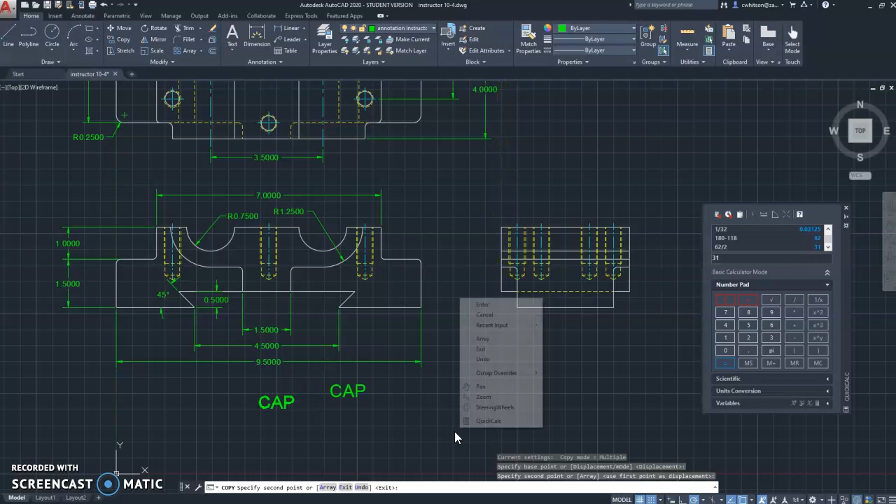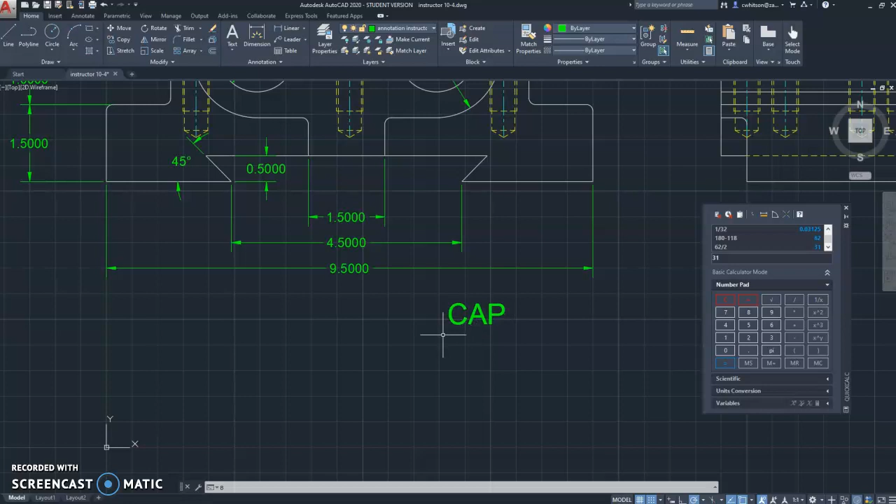So before we get started on that, I just noticed I need to copy some text down here. My escape button's not working. There, I'll just do it that way. Let's edit that to call this the base. Okay, I've got some weird computer issues going on here, hopefully that will settle down.

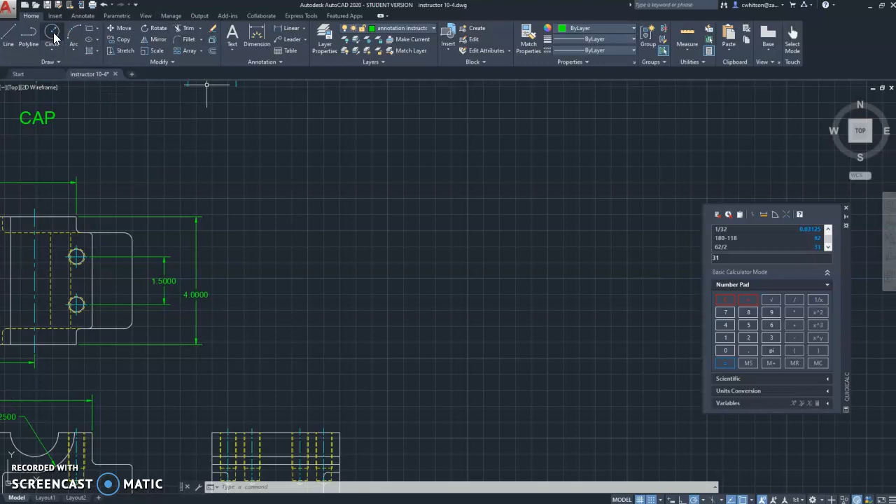Alright, so I think I will draw the bushing. I'll draw it over in this area somewhere. Let's start with the left side view, which is basically just a bunch of concentric circles.

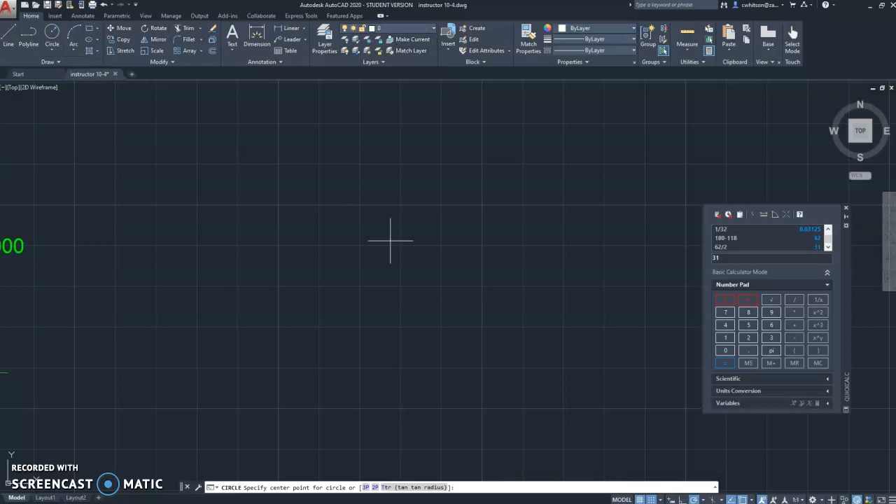Don't know why my escape button is not working, that is going to cause a problem. Hopefully it rectifies itself at some point. I want to go back to layer 0, and let's start a circle.

Okay, the outside diameter is 2. So D, enter, 2, enter. Then we've got a diameter of 1.5. And then the through hole is diameter of 1.125.

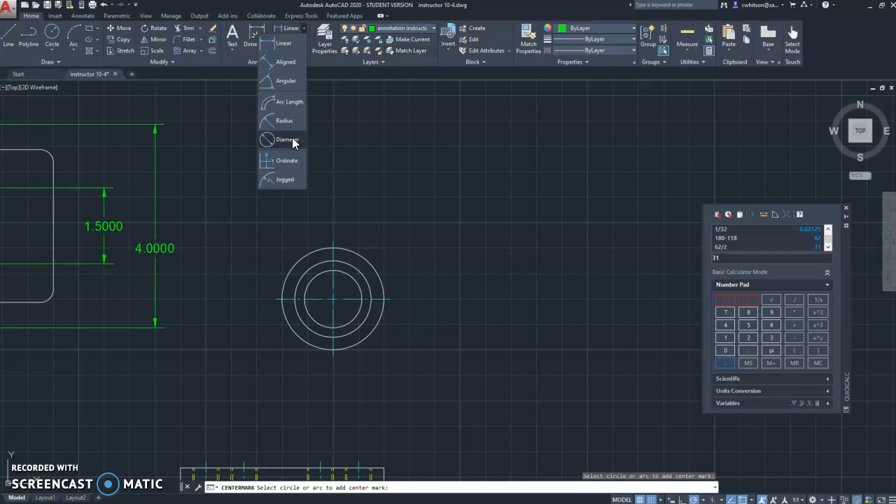Let's put a center mark on that, and let's go ahead and put our diameter dimension on it as well, on the through hole. I'll bring a center line, kind of use it as a construction line, over here to the right.

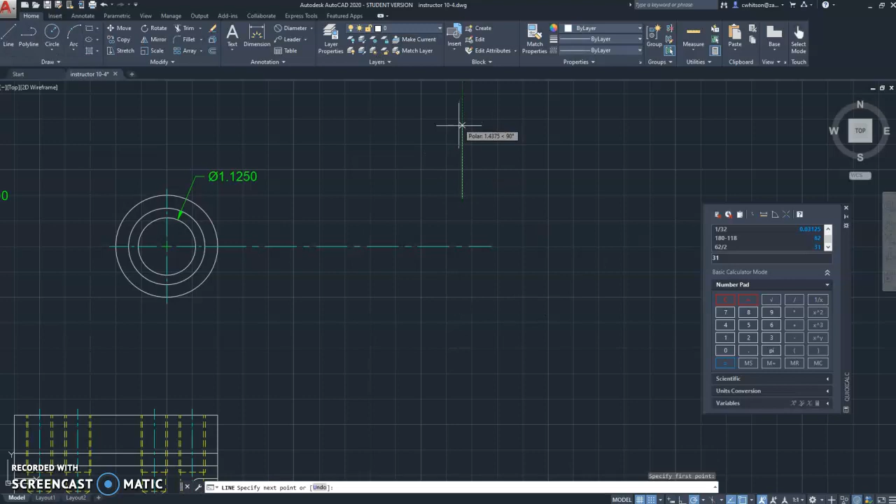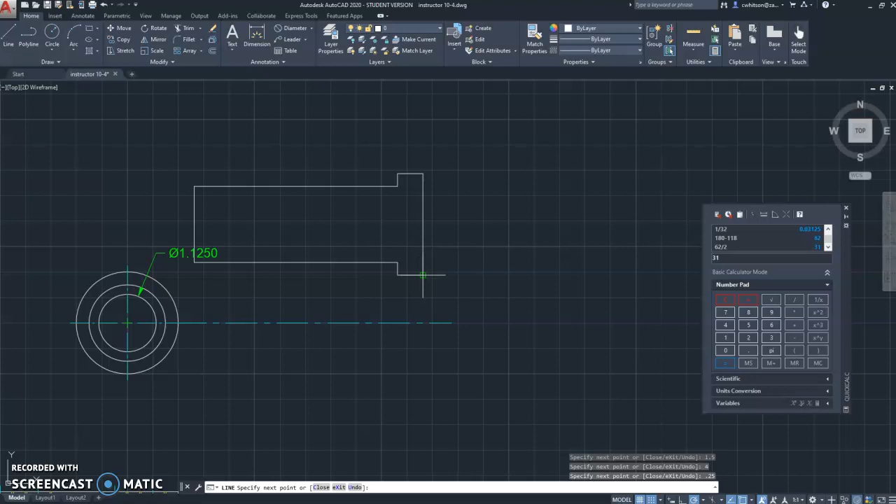And let's switch back to the 0 layer. I'm going to draw this - again, I don't worry about the exact position when I first draw it. Line that goes up, over 0.5, down - let's see, 2 minus 1.5 is a half, divided by 2 is a quarter, 0.25. And then 4.5 minus a half is 4. Straight down 1.5, back to the right 4, down a quarter, back over a half.

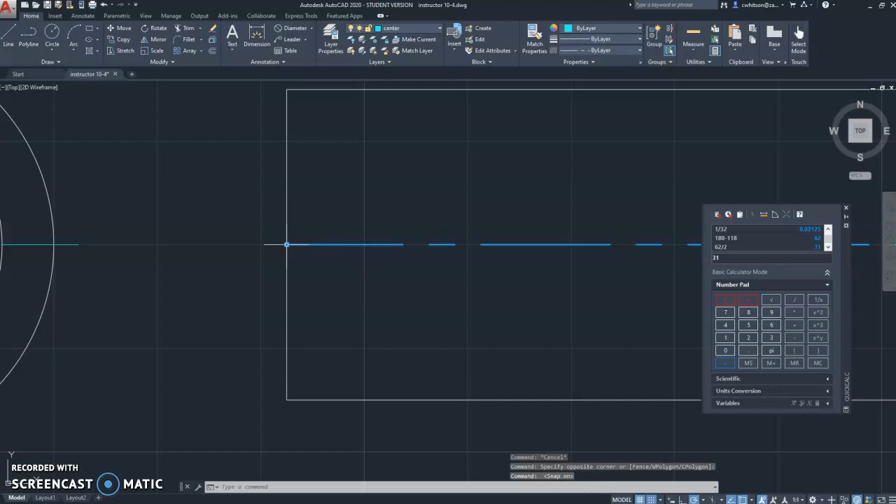Alright, so now I will take this bushing and move it so this midpoint ends up on the center line. Turn off my snap mode for now, sometimes it just gets in the way. I'll stretch out that center line to the left and to the right.

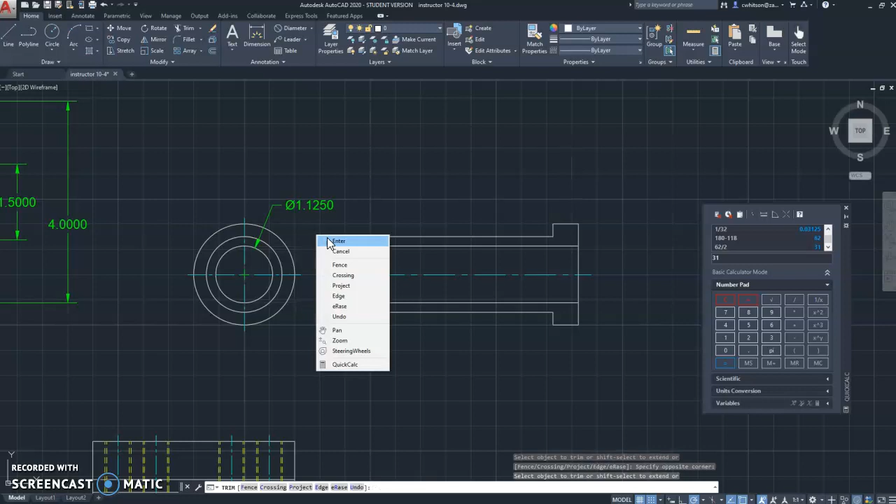Okay, now the through hole, I can use construction lines here to draw the top and bottom of the through hole and then trim it off. And then this right side view is a section view, so I should - oh, it doesn't look like I have a hatch layer in this template yet. So let's create a new layer, call it hatch.

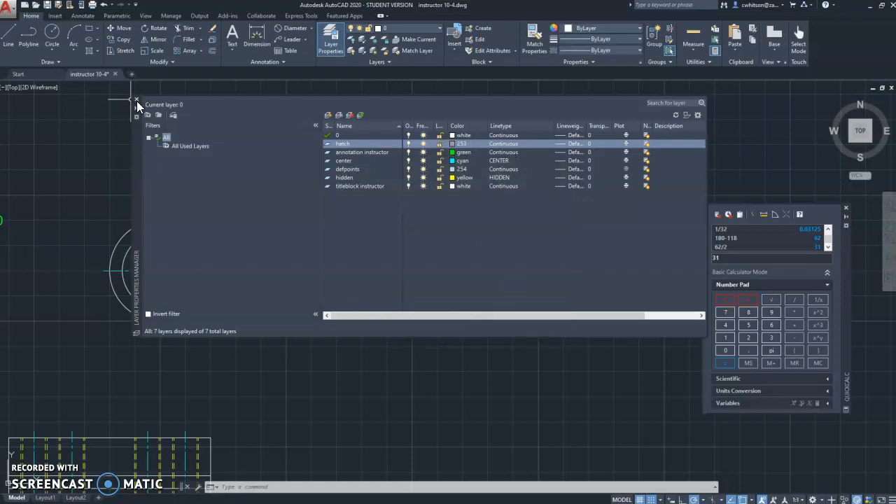And let's change the color, I'll make it a gray. Continuous lines are fine. Let's make that hatch ANSI 31 pattern. And I created the hatch layer - I didn't use it though. There we go, so after I've made it, I'll put it back onto the hatch layer.

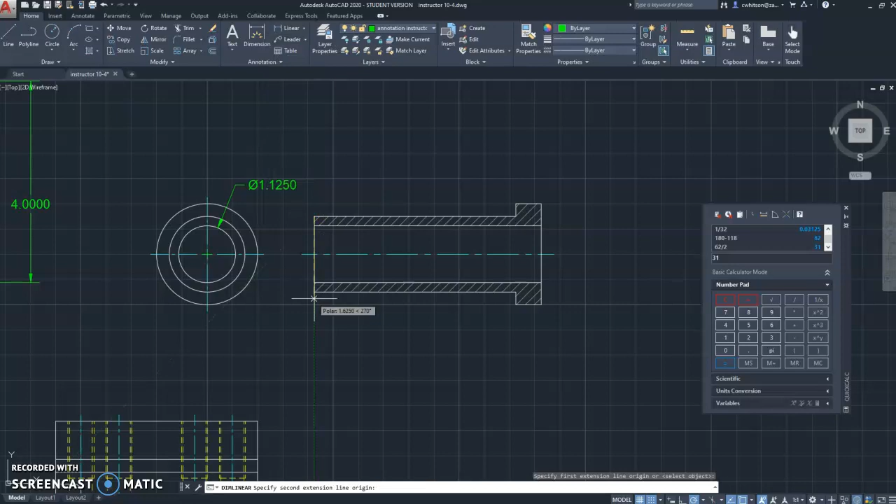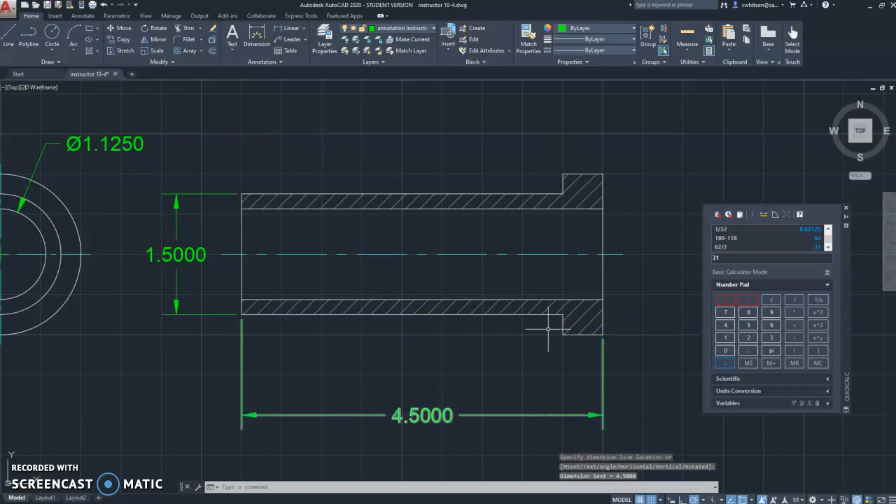Now I just need to add some dimensions. Got a linear dimension at this end. I probably need to give this a little bit more space between these two views. And the overall length, 4.5. That dimension is 0.5. This dimension is 2.

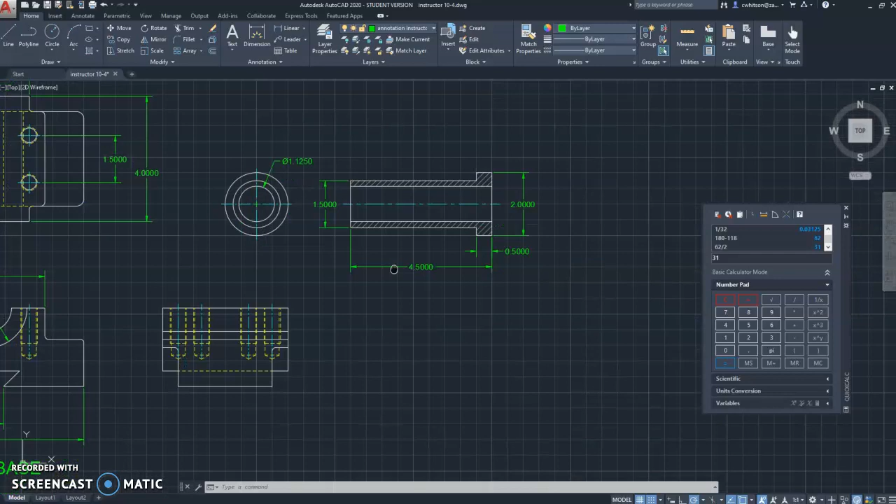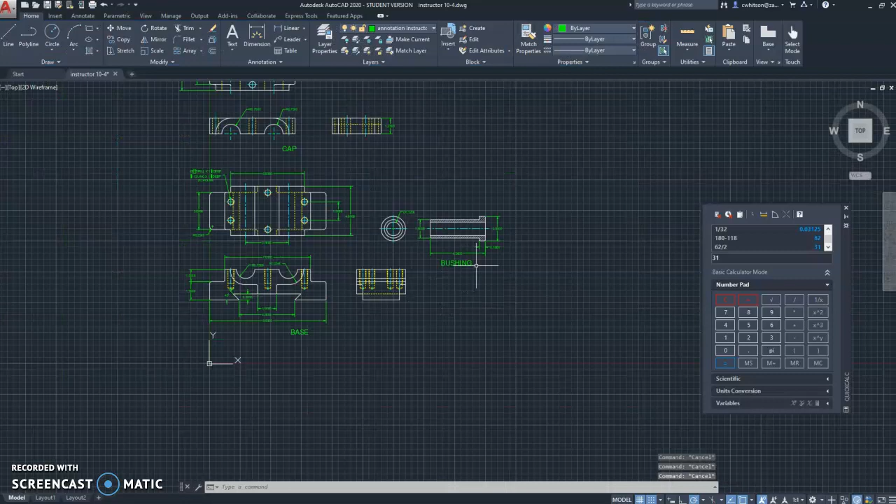And I'll copy my text from down here, copy it over here. See, now my escape button's working. And we'll call this the bushing. All text in technical drawing should be all caps. And that's it for the bushing.

I'll go ahead and do the hex head bolt. I'm less than 7 minutes into this video, so I've got time, I think I can make the hex head bolt. Maybe I'll just move this bushing up, and I can make the hex head bolt here.

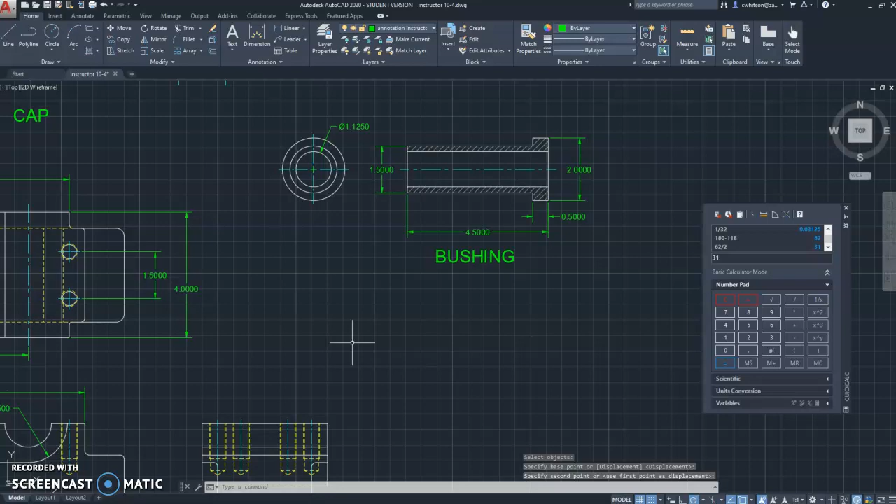So the hex head bolt is something that I do not need to draw from scratch, I can find a hex head bolt in the design center. So if I go to insert - well, I was a bit surprised. I came to my insert tab, I think that's where the design center has been located historically. I couldn't remember if it was on the home tab or the insert tab, but either way, I am not seeing it in this current version of AutoCAD.

So I did a quick Google search to see where it went or how I could find it. I still don't know where it is, but I can bring it up with a keyboard shortcut, so I'm going to do that. I'm just going to type DC for Design Center, and it brings up ADCENTER AutoCAD Design Center. And so that opens it up.

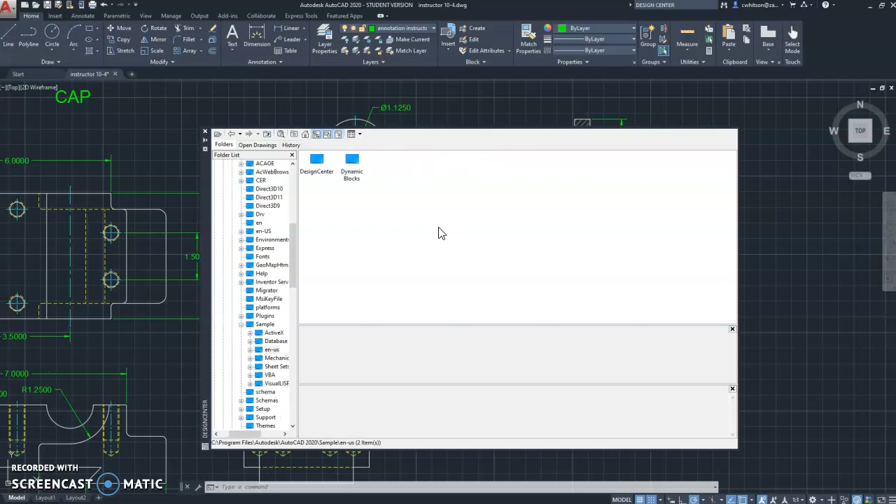So I'm accessing this for the first time with this new version of AutoCAD, and it can be a little confusing to find what you're looking for with these folders arranged. If you're accessing it for the first time, it should take you to this folder location. This tree diagram on the left shows all the folders where it's located on your computer. First time you come to it, you want to click into this sample folder, then go to ENUS, English US, Design Center.

What we have here are categories of different blocks - integrated circuits, different text styles, electronics, and so on. What we want are fasteners US, so double click on that.

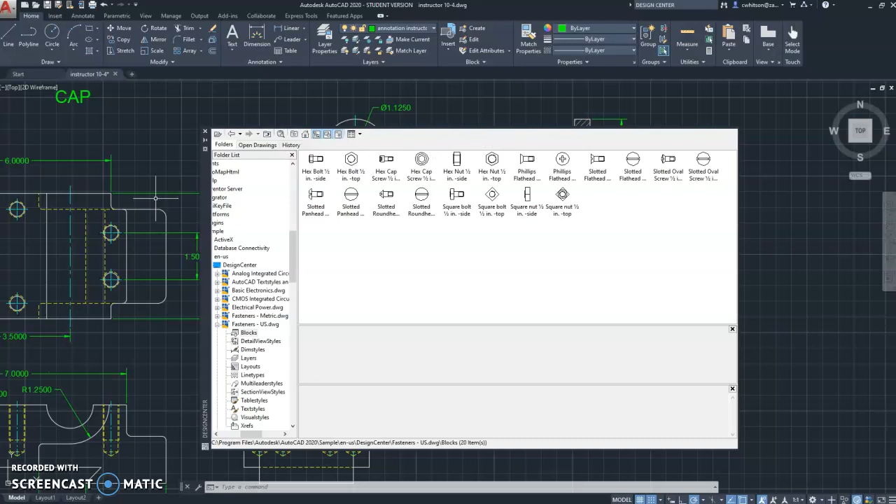And then we want to go to blocks. This is by no means a complete list of hardware, but it includes some commonly used pieces, including hex head bolts, nuts and screws. What we want is the hex head bolt from the side view and from the front view. I'll move this over a little bit so I can take these and drag and drop them. Okay, and that's all we need.

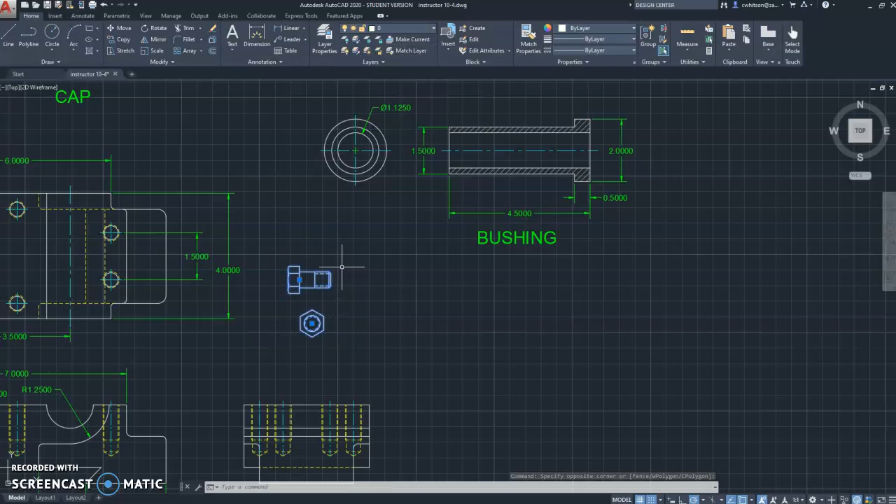So let's close out of that. Now I had my annotation layer as the active layer - let me switch that back to the 0 layer.

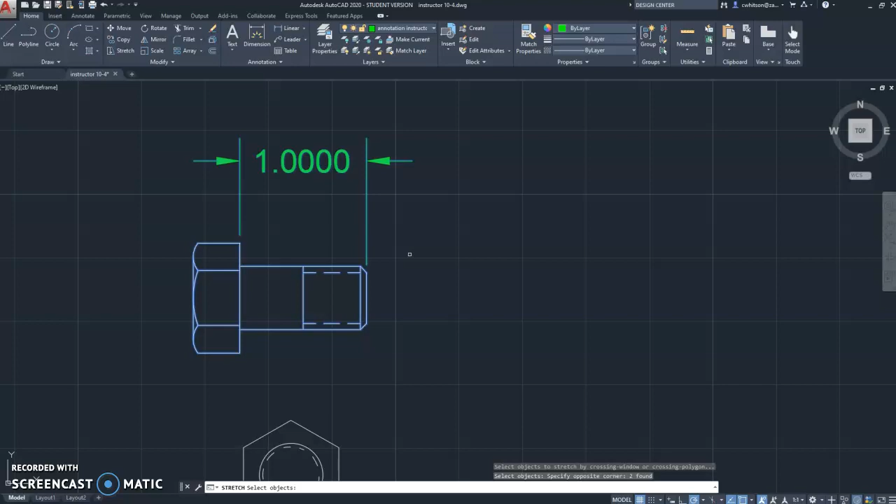And the length of this hex head bolt is not what I want. I want a 2 1/4 inch hex head bolt. If I put a dimension on here, I can see it's only 1 inch, so I need to stretch this out an additional 1 1/4 inches. But the thing about blocks is if I just try to stretch this out, it doesn't stretch - I can stretch the dimension, but not the block.

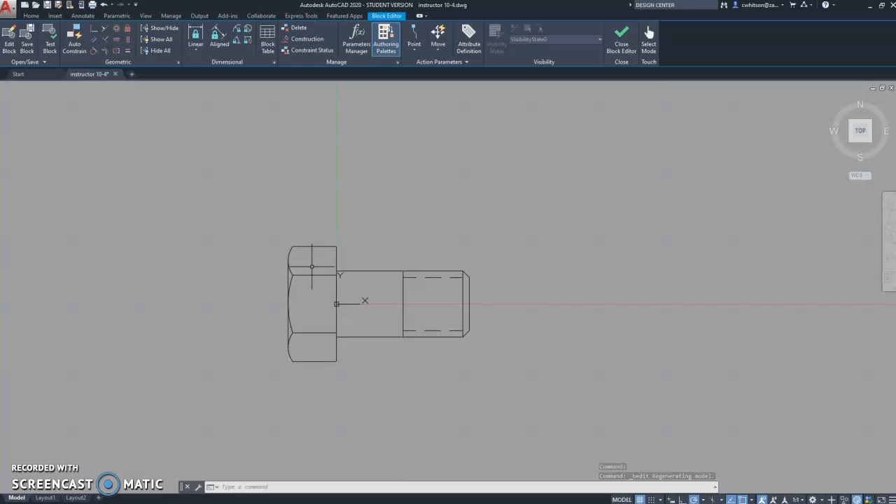So what I need to do is double click on this block to open up the block editor. Within this environment, I can open up and edit the block. So I will stretch this out 1 1/4 inches, 1.25, and the length of the threads...

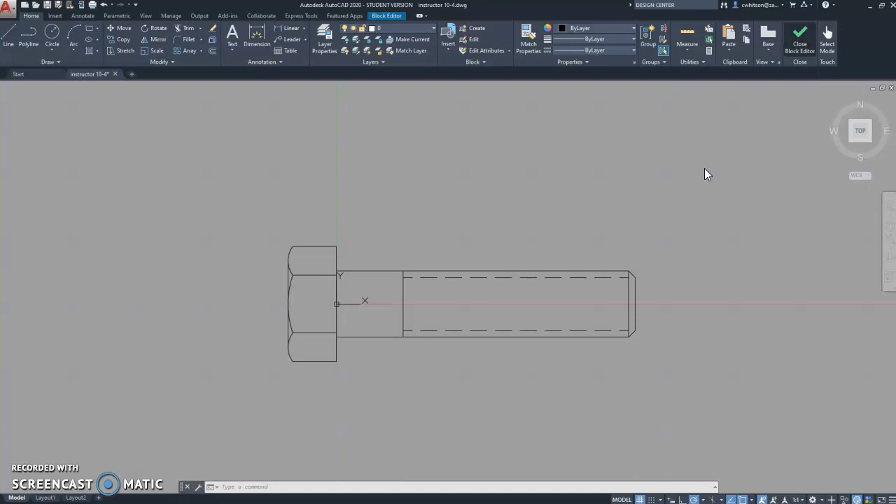is not critical, I would say, so I would just leave that line right where it is. That may not be 100% accurate as far as a partially threaded bolt, how far up the shaft the threads go, but this is really just a diagrammatic representation of the bolt anyways. So I'm just going to leave it like that. Close the block editor, save the changes, and that changes that bolt.

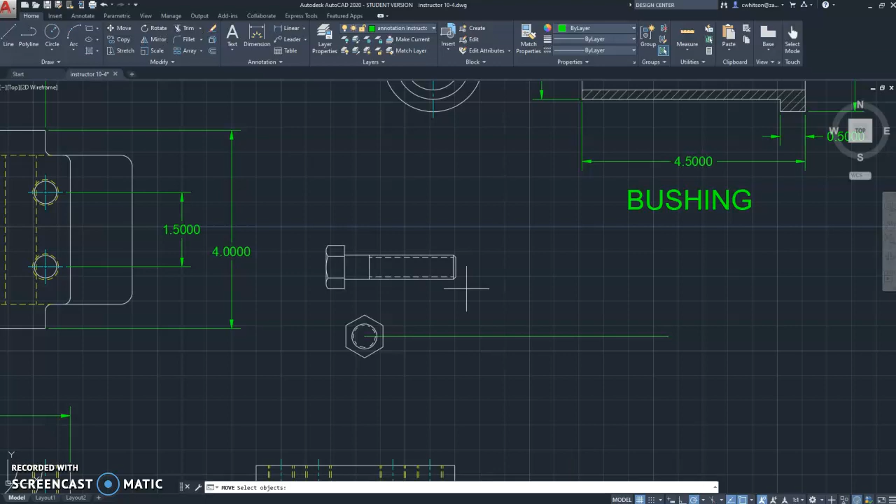And if we had multiple bolts in our drawing, this would change all of them. So these two views are two views of the same object, so they need to be aligned with each other. I need to move this so that the centers are horizontally aligned. And then I'm just going to add a leader.

So let's add it from here. And this is a 1/2 inch by 13, or 1/2 inch 13 by 2 1/4 inch UNC-2A. And that, no, I'm going to unstack that text or that fraction.

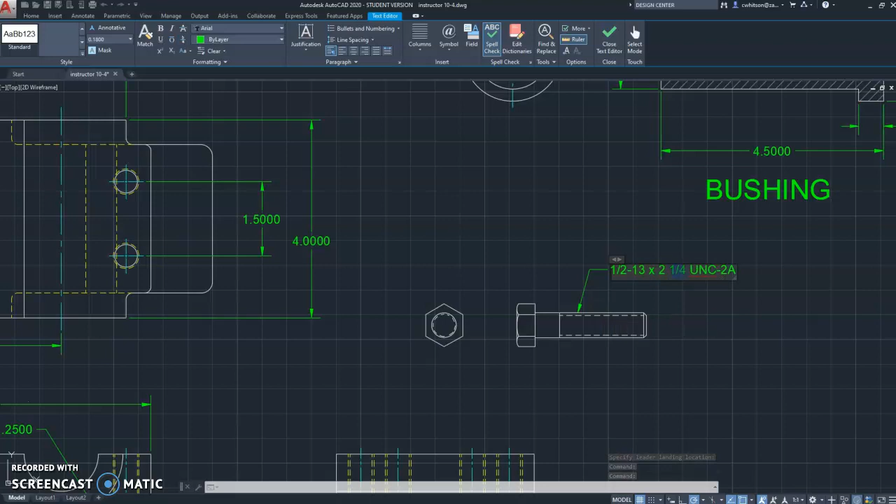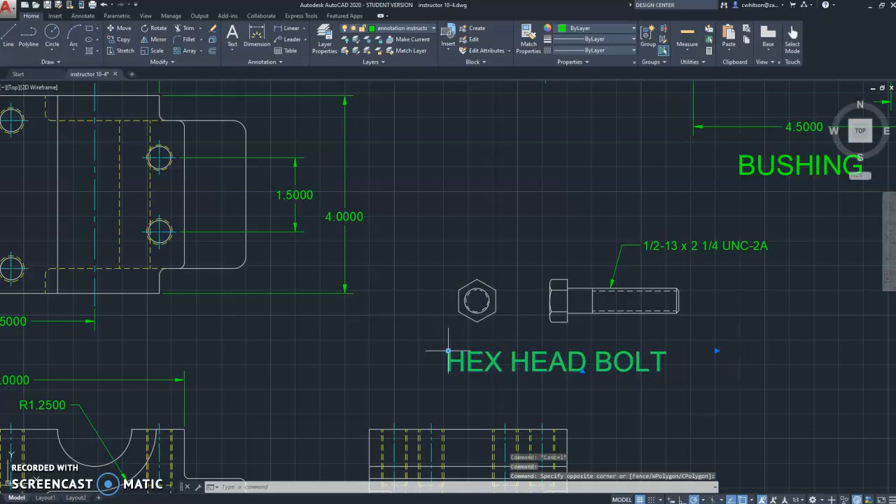Okay, and I'm just going to take this text here, copy it, and change it to hex head bolt. If I stretch out the box for that text, it will allow it to just be 1 line instead of automatically forcing it to be 2. Okay, and there we have it.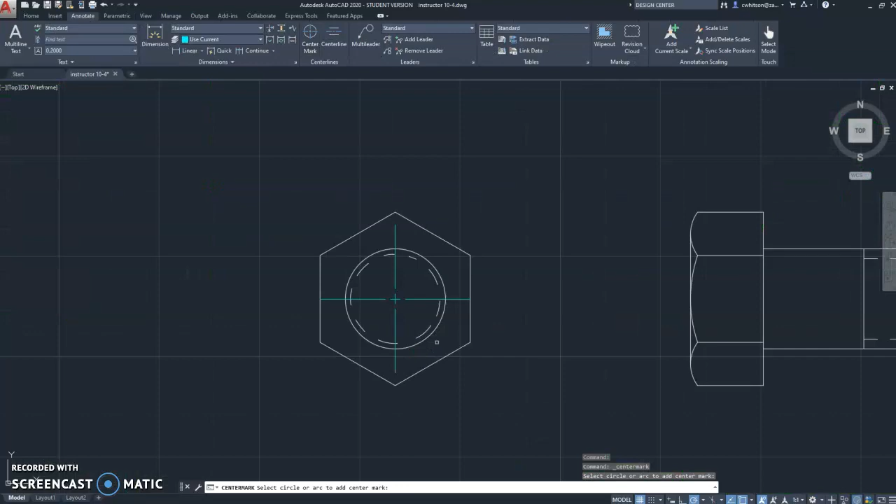We've got our bolt. Oh, I could add a center mark there, I suppose. Let's switch back to my center layer and add that center mark. Ooh, I don't like the way that ends right on, well, it's not right on, but really close to the edge of that bolt. You know what? Maybe I won't go with the center mark - maybe I'll just draw it with lines.

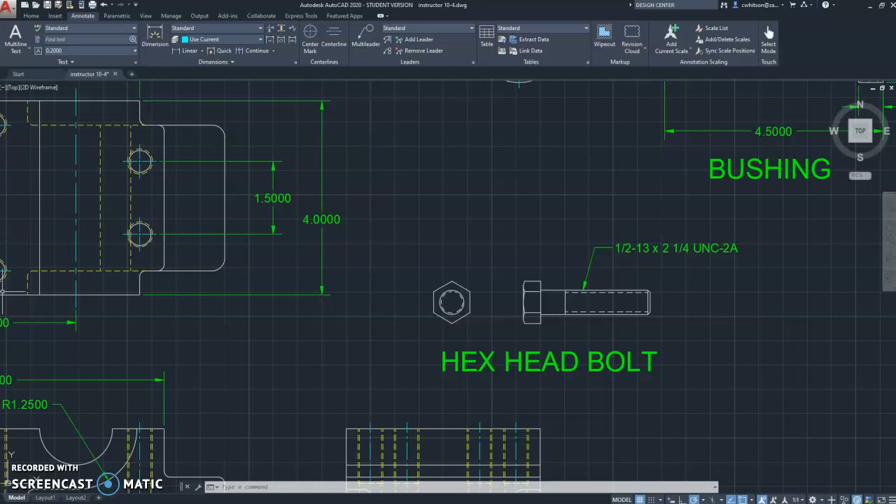But I'm just about out of time here, so I think I'll add the center mark and the center line through the side view, and then I'll be ready to put these parts together to make my assembly view. And I'll do that in the next video.